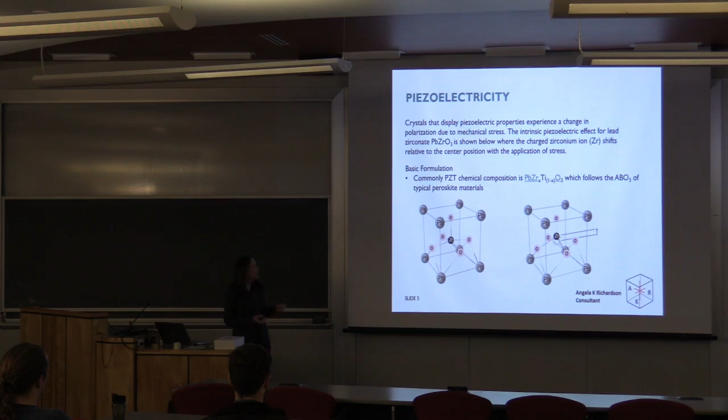So the reason you have the ability to create a voltage is the movement of that zirconium atom. You can add other dopants to this constituent, but basically, depending on what materials, what additives you add to that crystal structure, you'll get different electrical properties.

Within that ceramic structure itself, the way you get to a point where you have that polarity within the ceramic crystal overall is you have these domain structures. In an as-fired ceramic configuration, the domains are random. But when you process piezoceramic, what happens is those domains basically start to align, and overall you have the polarity of positive and negative.

The depolarization is when that ceramic starts to, over time, logarithmically, relax. So what happens is those domains start to want to go back to their original random configuration. And that happens logarithmically. So the first 10 days you may have a certain percent, then the next 10 to 100 days, the same percent, and so on.

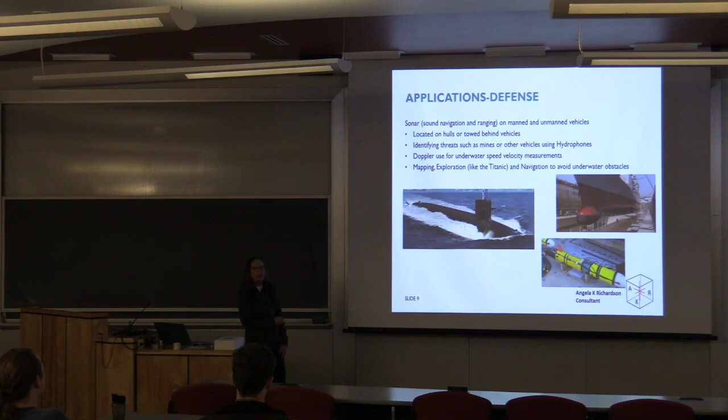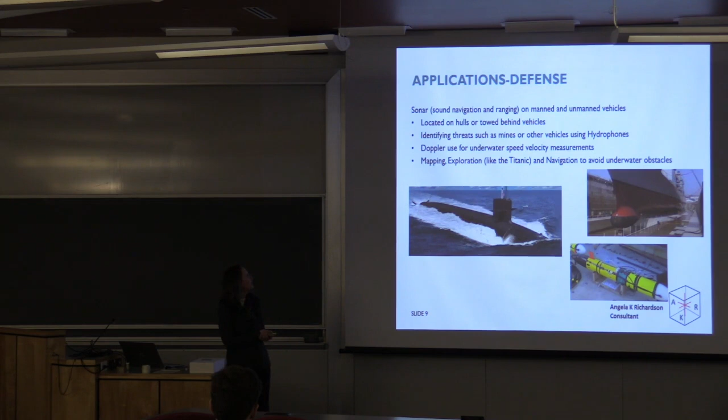So what's happening is on a hull-mounted ship, you have about 5,000 pieces of piezoceramic. Those piezoceramics act together as a transducer, sending out a signal to look for, it could be a submarine, it could be a geological feature that they're looking for. So sonar in general is identifying threats.

The other devices that typically go on the submarines are hydrophones, and those are primarily listening devices as opposed to projecting devices. So those listening devices are strings of piezoceramic that get dragged behind, also listening to what's out there in the ocean.

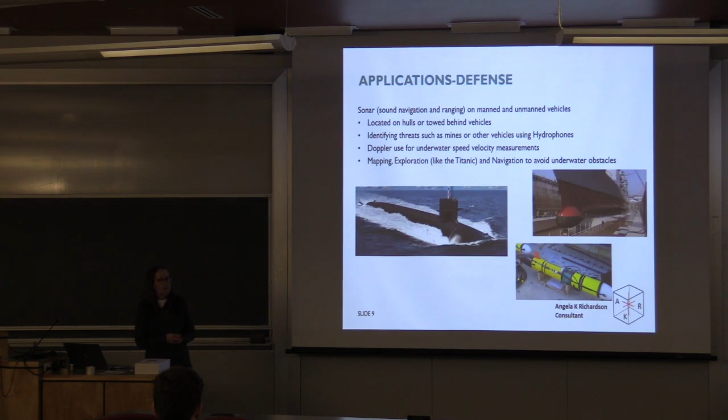Doppler, piezo is used in Doppler for basically speed velocity, and definitely mapping exploration like the Titanic.

In the medical applications, you see piezo out there in ultrasonic imaging. So anytime you go in there and get an ultrasound, what you're seeing is a transducer device that's sending out an acoustic beam, and then reflecting on tissue and coming back. And most of the transducers in ultrasonic imaging now are actually single crystal piezo.

Then also therapy, ultrasonic therapy, endoscopic therapy, breaking up gallstones, and treatments for cancer.

It's something that I was intimately involved in, in terms of finding out manufacturers and traveling the world to look into further.

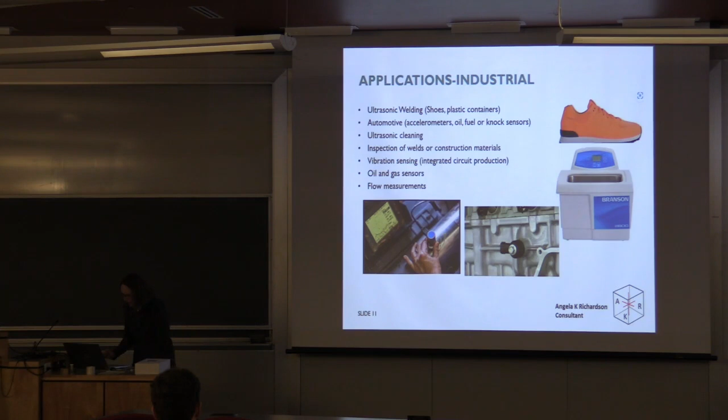And in commercial, you have fish finders, of course, haptic feedback. So when you play a video game and you feel the vibration, oftentimes that's a piece of piezoceramic giving you that feedback. Buzzers, like in your watch, micromotors for cameras, and your typical piezo lighter.

Now those piezoceramics that are in all of those devices, they come in all shapes and sizes. And Lindsay was gracious enough to bring some ceramic here. So whether it's at the end of the class or you want to just pass these around, I would imagine these are all lead zirconate titanate, so fairly heavy compositions there.

The larger the ceramic, the lower the frequency, somewhere in the 10 kilohertz range, and the higher frequencies typically in the 5 to 10 megahertz range.

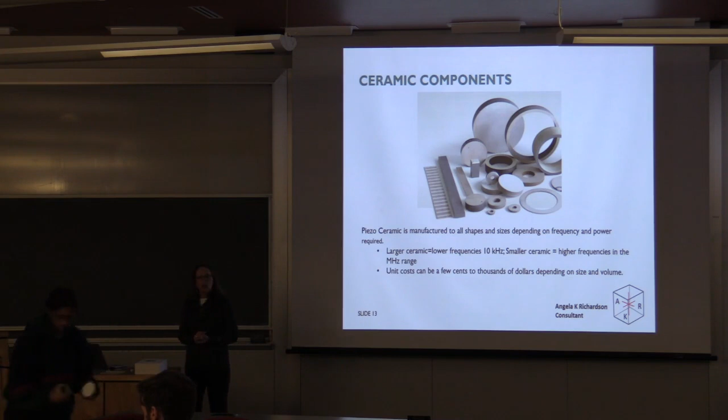Unit costs, this is where manufacturing comes into play. Piezoceramic can be only a few pennies, or it can be tens of thousands of dollars. So as a manufacturer, you have to think in that economic sense in terms of what market you're going to be in.

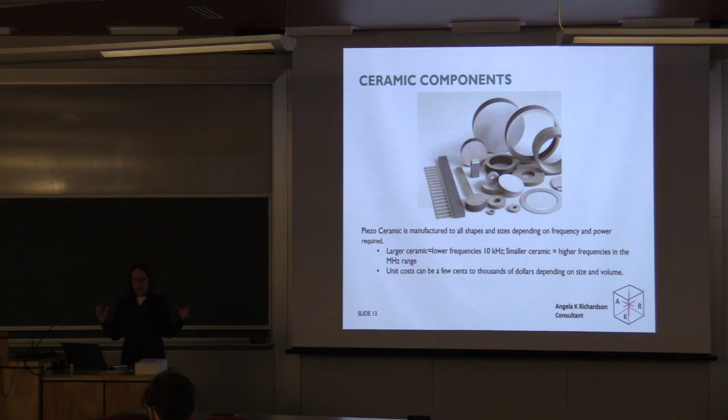So you're starting with metal oxides: lead oxide, titanium oxide, zirconium oxide, barium strontium carbonate, niobium pentoxide, iron oxide, etc. And then, like I said, those different dopants that are going in there provide different electromechanical characteristics. It's usually an electronic grade of raw materials, which means greater than 99% purity and a very fine particle size, usually large surface areas.

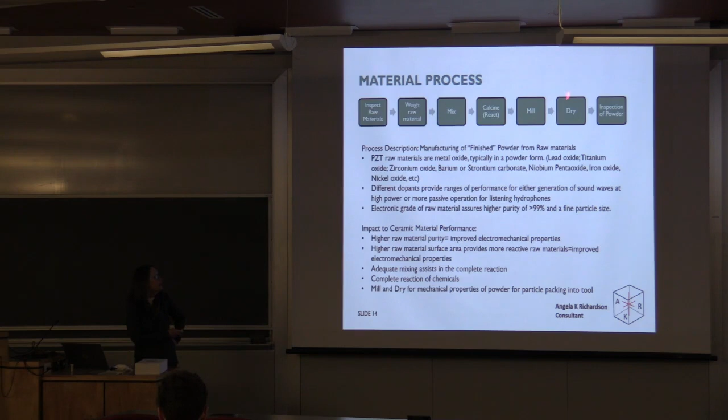After you've inspected those raw materials, you're going to weigh them, mix them, react them through calcination, and then mill them down to a fine particle size.

Then dry the powder and inspect it. So what I have shown here at the bottom is basically some of the industrial type of equipment you might utilize: a V-cone blender for mixing of the raw materials, vibroenergy mills to break down material, which can be used for mixing or for the milling process to reduce the particle size, and then drying.

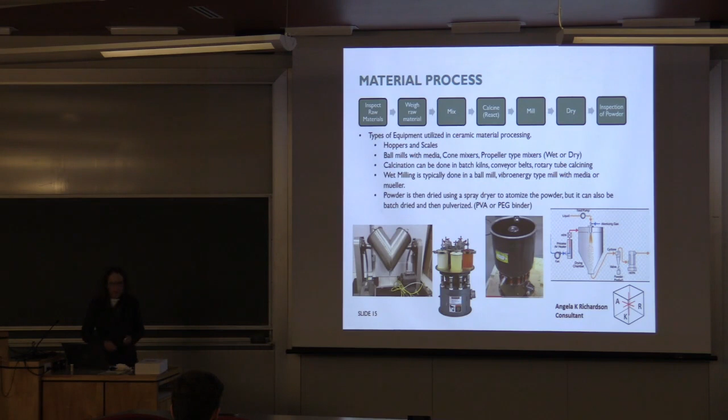Drying typically can be done by hand, but almost all of the commercial ceramic manufacturers have a spray dryer. In the milling step, typically there is an organic binder added, polyvinyl alcohol or polyethylene glycol binder, to assist later on in the compaction of that ceramic.

So then after you've got the powder manufactured, you're going to go through the ceramic process, and we'll walk through each of these steps here. There's just another picture of some more piezoceramic.

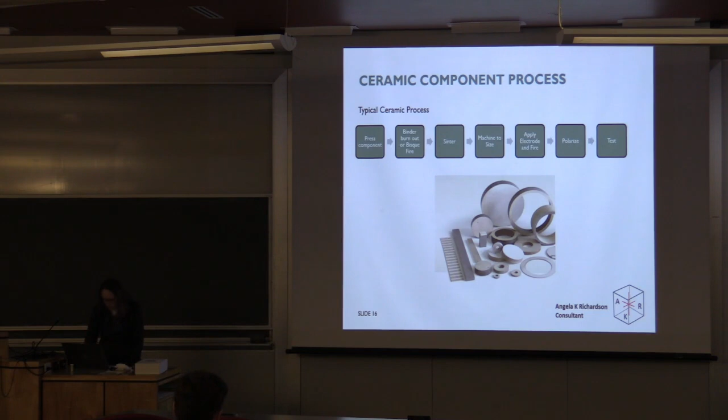First and foremost, let's press that ceramic. So we're going to take that powder and use either a hydraulic or mechanical press, typically to about 10,000 psi. This is a typical type of Dorst press you might use, a mechanical press.

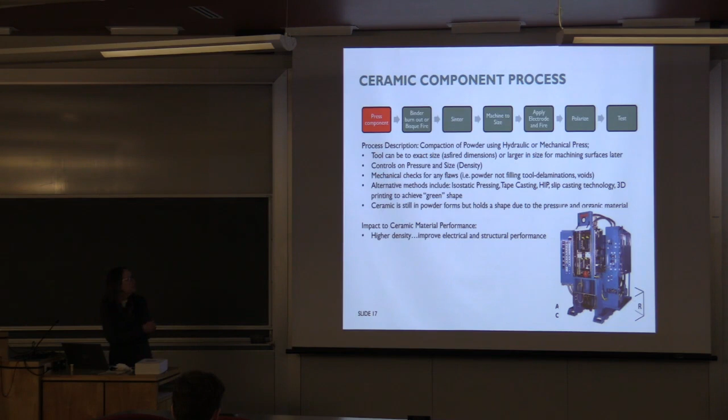We'll go to a particular pressure, and you get a particular size based on the tooling. What's critical is to check for any flaws in that green state of the ceramic, such as delaminations, voids, etc. The ceramic comes out still in powder form, but it holds its shape due to pressure.

I'm sure you guys might have equipment that does this.

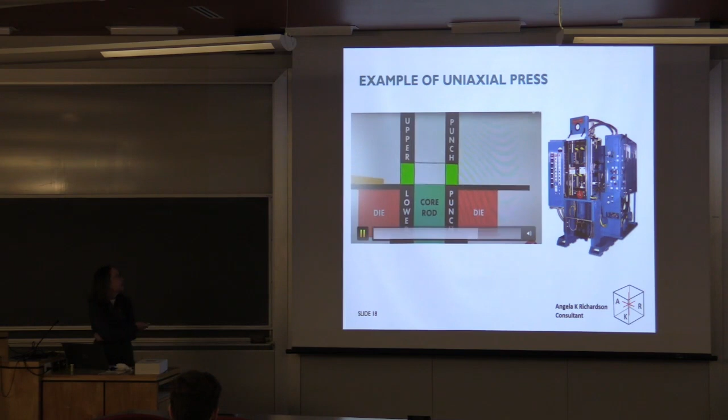So in that hydraulic press, you're basically using a feed right there to fill up, and then upper and lower punches to compress that powder, and then it just gets pushed to the side.

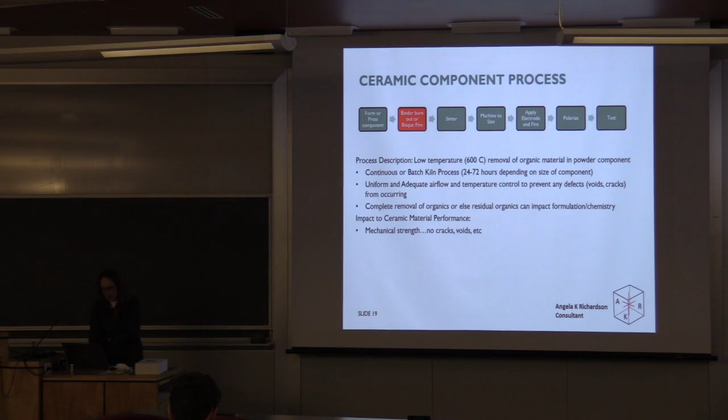Then the next step is, because it's a lead-based ceramic, we need to get some of those organic binders out of that composition prior to our sintering step. So what you have is this binder burnout, some people call it a bisque fire. It can be done in a continuous or a batch kiln, usually taking 24 to 72 hours. It's pretty critical that you have a lot of airflow because you want to remove some of those organic binders. Once again, the key feature there is just mechanical strength.

The next step is the densification, the sintering process. With a PZT-based material, you're going up to about 1200 C, processing it for about 24 to 48 hours. In manufacturing it's so critical - as students you might be doing some firing in small kilns, but think about a kiln that is essentially 6 feet wide, 10 feet deep. When it's that large, if you don't have uniform temperature, what you're going to get is non-uniform product.

And when you have a specification you have to reach at the end, you could have a lot of waste, and so your yield can be very poor. So it's so critical that you're maintaining a uniform temperature there, and we're talking like 2 to 5 degrees Celsius within that scope of distance.

You can add atmosphere. In the piezo world, we typically might add oxygen as an atmosphere to increase the densification. The components themselves are placed in saggers, typically alumina crucibles, to contain the lead volatilization.

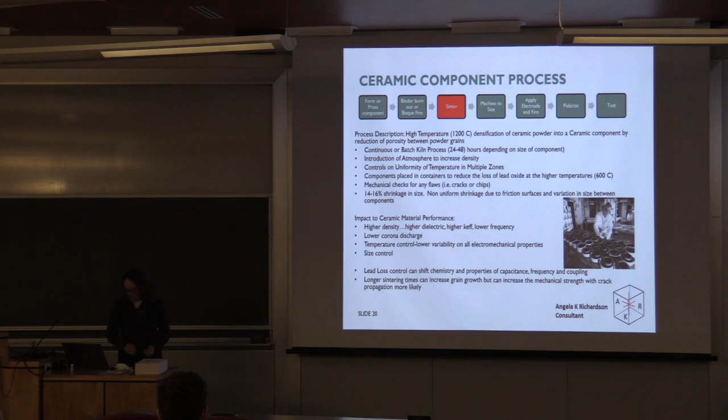In the next step, we're just going to do some machining process. Like any ceramic, you typically are using silicon carbide, diamond-based bonded media, and you can use any normal machining centers - they can be lappers, lathes, etc. And then oftentimes you will stress anneal that configuration because you've broken up that surface.

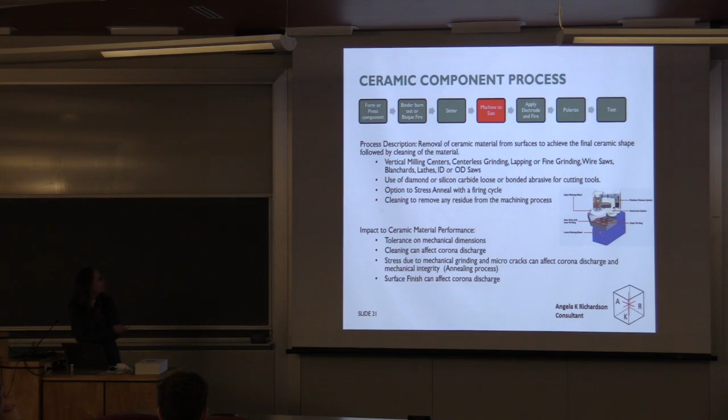The next step is, you probably saw in some of the ceramic that you have, it has a silver paste on it. And that's because we're going to solder wires to this ceramic, since it's an electronic component. So in that electroding process, we're going to apply a silver paste.

The paste itself is about 70% silver metal, a little bit of glass beads, and it's typically screen printed on, but it could be sprayed, dipped, electroplated, or sputtered, and then it is fired to make sure of that adhesion between the silver paste and the ceramic structure.

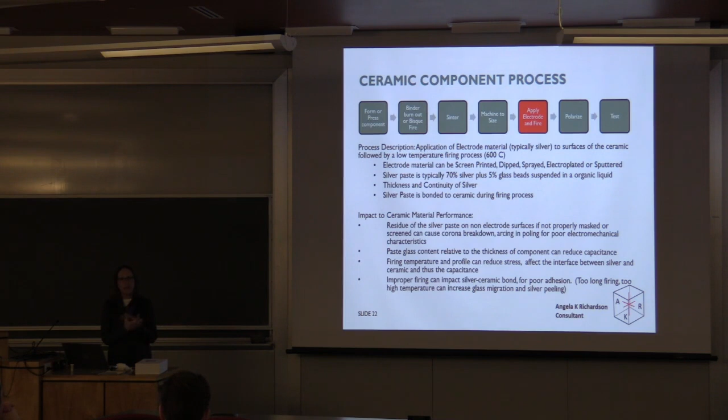The next step is polarization. We talked about that, aligning the dipoles. So the ceramic is placed in a bath of high dielectric oil. We apply a voltage to it, pretty high voltage, 40 to 60 volts DC per every thousandths of an inch, so it can be up in the 10s to 20 kilovolts.

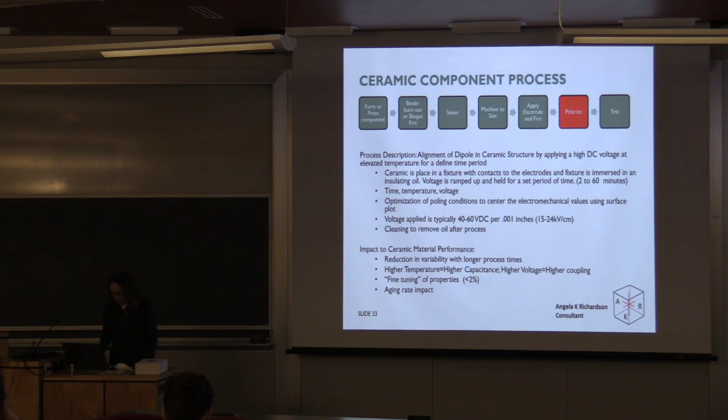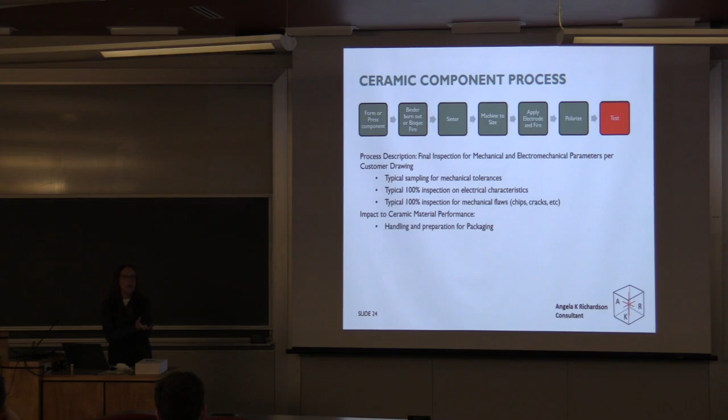Then that ceramic is cleaned and ready for its final test. So when you talk about manufacturing and assuring quality for your customers, most manufacturers will do some kind of sampling, or they might do 100% inspection, depending on the requirement and the difficulty of manufacturing that part.

Okay, you made that ceramic, but in the manufacturing world there's a whole other level of things you have to consider - those being documentation. There are procedures on how to run the equipment, procedures on how to validate the equipment so it can actually do what you want it to do, maintenance plans for the equipment so you cannot spare to have a breakdown of even one day, and then work instructions for that particular part.

So all that documentation has to be done in advance of even making one part. Then you have traceability - traceability back to the raw materials. You have records showing all the steps in the operation and who performed them.

Guess what? Boeing didn't do that. Think about that panel that came off - they can't even trace back to who did it. And whether it's the FAA or your customer or the defense industry, you have to have those records, and they have to be available like that.

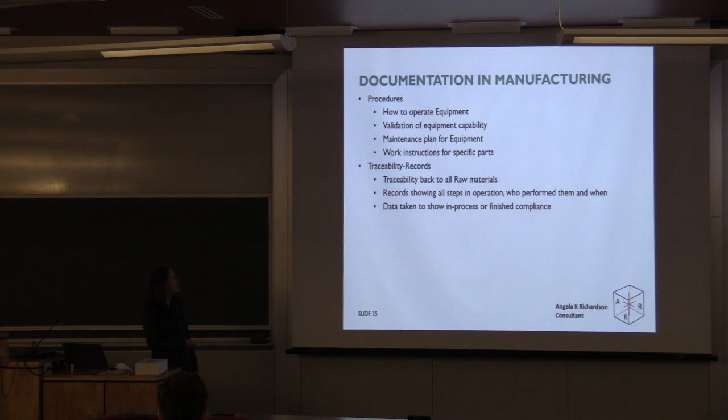So then certainly data that you've taken in the course of your process. Training—pretty self-explanatory—all your operators need to be trained.

Lean manufacturing is another key thing in the manufacturing operation. I don't know if you've heard of 5S before—reducing waste by looking at the flow. 5S is about making sure everything is organized: you go through your factory, every tool is where it should be, everything is clean. I've been in factories in Europe where if you look at the light fixtures above you and they're filled with dust, guess what—you're going to have foreign objects in your ceramic component. So if you're not considering cleanliness as part of your manufacturing process, there's a huge opportunity to fail there.

Statistical process control—how you sample, how frequently you sample—and multivariable testing. If you have a problem and want to solve it, you could try testing one thing at a time: test temperature, or test a different piece of equipment. If you do that, it could take weeks and months. Multivariable testing is a way to test all of those variables at once, look at it statistically, and see what is significant, what is causing your problems.

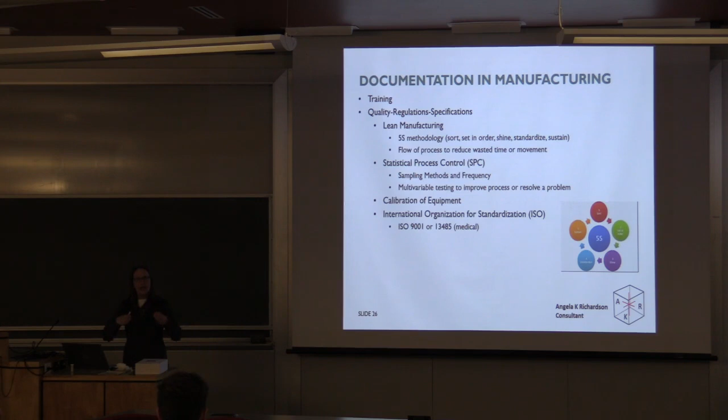Calibration of equipment—obviously I don't want to go out there and use a micrometer or a caliper and then find out later it wasn't holding tolerance. So that's critical. And then the ISO documents—anybody who comes into your facility is going to want to see that you have certification for certain standards. ISO 9001 is pretty standard in manufacturing, but 13485 is what the medical industry uses. Basically you're defining how you're going to do a process and how you're going to keep your records.

I'm going to finish up here and hand it over to Lindsey, but as I look at the challenges for people going into manufacturing in the ceramic industry: dependence upon material sources outside North America. Most people are getting their raw materials from China and Asia. Is that a problem? It could be if all of a sudden you can't manufacture what you need. I think the government is very concerned about that with chip manufacturing right now.

Dependence on lowest cost labor—when I look at where I want to manufacture something, places like Mexico, Eastern Europe like Romania, or Asia might come up. Those are great options, but you're dependent on a remote location for your manufacturing. And then there's automation to stay competitive. If you're trying to reach a price point of maybe a dollar, or 50 cents, or even 5 cents, you can't do that unless you've put the time and effort into automating your process.

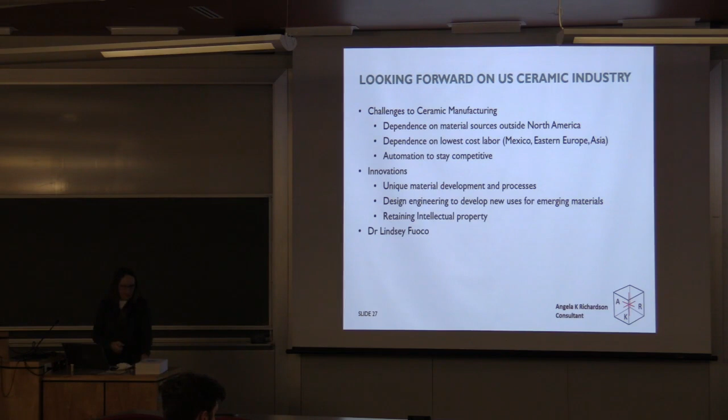Looking forward, I think Lindsey will talk a bit about material development, design engineering—how to use piezo in new devices going forward—and retaining intellectual property. I can tell you I've worked at companies where their IP was taken overseas, and from there on they basically lost their competitive knowledge base and business. So with that, I'm going to turn it over to Lindsey, and she's going to impress you with her next generation stuff. Then we can take questions at the end.

Here's the HDMI. Yeah, hope you have an HDMI. And you're okay with power? Yeah, okay, cool.

Here's some more—this is some of the ceramic that was used in some of the brain cancer research. I don't think I put that on, but...

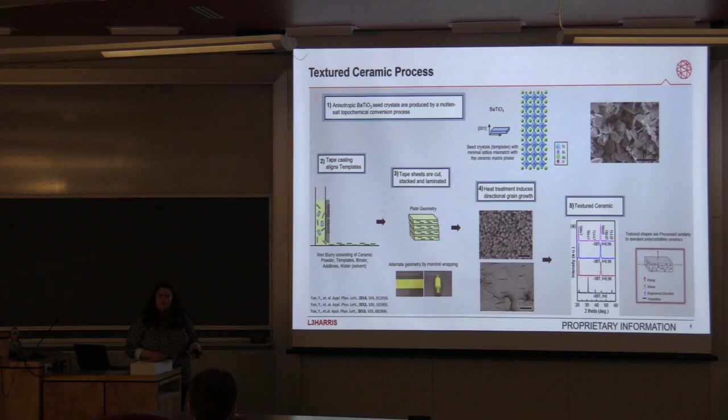This is just an example of a structure here. Once it's been heated, we electrode it, we pole, we do everything the same as a typical ceramic, as Angie talked about earlier.

Another important extra step is we have to grow these template particles. We may use less than 5%, but they need to be in a special, highly anisotropic morphology. We take an Aurivillius phase and do a molten salt process, since this Aurivillius phase typically always grows as a plate-like structure. Barium titanate itself usually wants to grow in a one-step solid state reaction as a cube. So we use this topotactic reaction series to get our barium titanate, but keep the plate-like morphology from the first structure type.

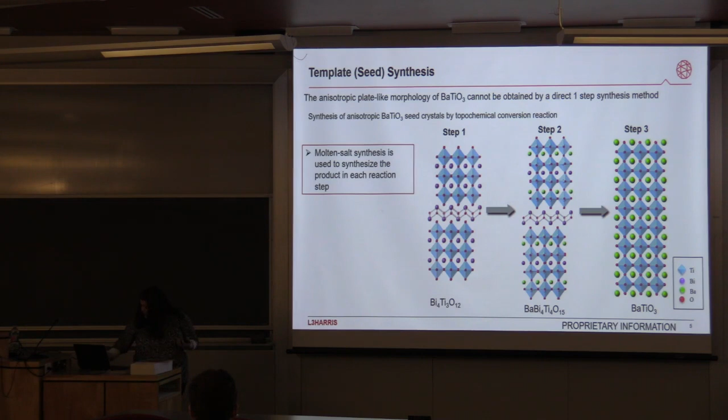The way we do that is we use a molten salt process. Really, it's just adding salt, sodium chloride, potassium chloride. We like to use the eutectics because you can lower your reaction temperature by combining them. Our metal oxides and the reagents will precipitate out as metal oxide crystals. This is used in a lot of different things to target alternate crystal morphologies that we wouldn't otherwise be able to get.

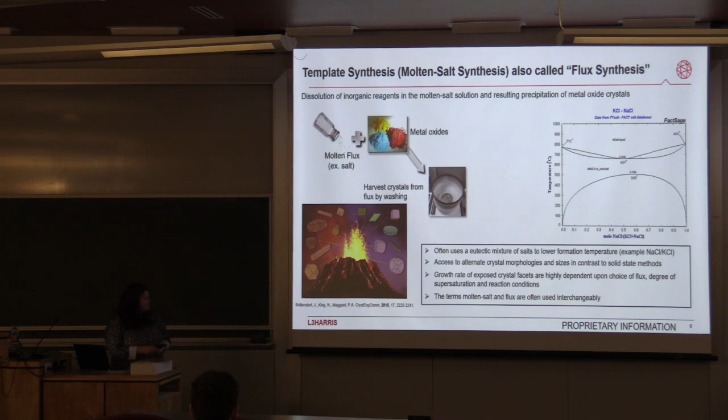For textured manufacturing, you need an automated tape caster, which has automated gap control of your doctor blade so you can control your tape height. From there it goes into another piece of equipment. You transfer your roll, and your roll then cuts your tape into what I've passed around, which you can peel from the backing, a shape that you've set, and puts it into cassettes.

From there it gets peeled off the mylar backing and stacked by another automated piece of equipment. When you start out R&D for this, it's all done by hand by technicians - all the cutting, peeling, stacking. So this is really the next step of the process that we now do in manufacturing. From there it integrates back into our same process, and we also utilize equipment we typically have in our ceramic processing factory.

A really important part of all this is maintaining a set of key processing indicators. The way we track that is powder X-ray diffraction, particle size analyzer, and scanning electron microscope. We don't do this for every batch, but as ceramic manufacturing, when you see an issue you have the tools to look at it, and there are also points when you need to check these things to make sure the product you're putting out at the final end stage is the same each time.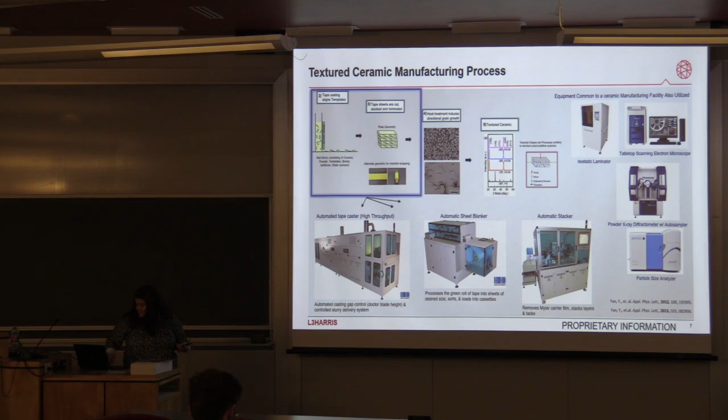So I just wanted to show this here. Angie touched on some of this. So where does textured fit in? This is actually our process at L3 Harris, or Edo Western, and this is kind of how it proceeds.

We make our matrix ceramic that we're going to texture similar to every other ceramic, and then it deviates. We send it to tape casting, it gets cut, it gets pressed in our textured ceramic manufacturing center, and then it joins up again. It fires exactly the same as our other ceramics. What's really awesome is we're able to maintain the same CPKs as we do for our non-textured ceramics, which have been around for 70 years.

So with that, I didn't want to talk about too much today, but yeah, that's the next generation of ceramics. Here I've shown - I can pass this around too - this is textured, it looks exactly the same. You're not going to know unless you put it in an X-ray or an SEM or look at the properties. But that one hasn't been electroded, I just pulled it off the shelf this morning.

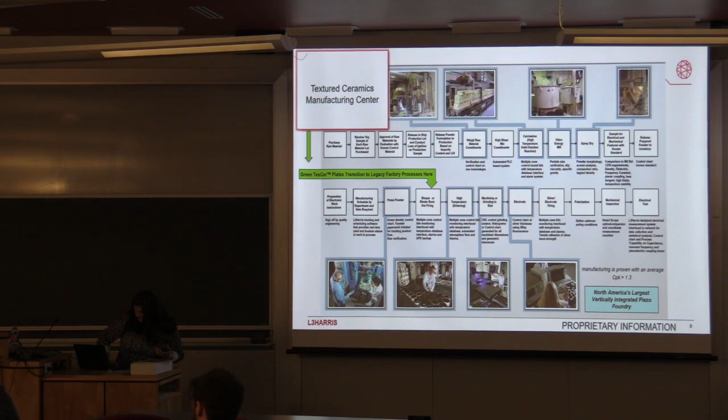Yeah. So Lindsay, in the texture material, are you using - is it going into the same types of industries and applications, or is it primarily focused on defense?

You know, it's going into the same industries and applications. I think with a lot of new stuff like this, defense adopts it first, and that's where we get our most backing. But certainly in the medical industry, what it opens up is, for ultrasound like you showed, that's primarily single crystal. Textured has these improved properties where I think it's really going to replace some of that as well and be a lot cheaper. So yeah, certainly we're targeting other uses as well.

So I'm doing tape casting for my own thesis research, and I've seen a lot of problems with aqueous tape casting. How do you guys get around those issues?

First off, yes, it's much easier to do non-aqueous, but when we started out, we wanted to tackle aqueous because at the end of the day, we would have to build an entirely different facility with different ventilation and everything. I think a lot of it comes down to understanding your viscosity, your rheology, particle sizes—there's a lot in there. It's not cut and dry when you say, oh, we'll just increase the doctor blade and we'll get a thicker tape. That's not quite how that works. So yes, there are some obstacles, but early on I think it's good to struggle with it, because this is something that's more easily adopted than having to put all this new ventilation in. And aqueous is more difficult.

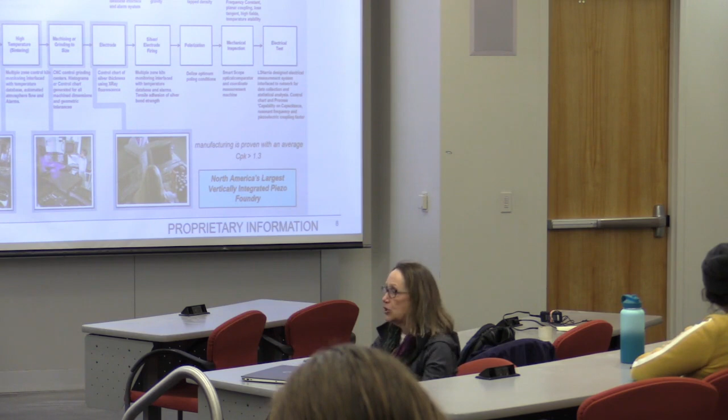As far as controls for dielectric, it is within a wide window. Let's say a wide window being plus or minus 15 to 20 percent - it's easy to hit that. When you're restricted down to a wish list of maybe plus or minus 5 percent, it becomes very difficult in terms of repeatability. And I think the key there really is that if you change your source of supply, whether forced to do that or you elected to do that, that could totally affect that performance. So you may have to adjust chemistry, you may have to adjust process to zero in on that value.

But could you talk about when you think the Salt Lake facility will be lead-free, or will it never be lead-free? I don't think it'll ever be completely lead-free. We offered lead-free formulations from the Western facility.

Products that it goes in are going to be around for a long time, especially military products where they use this for 20 more years. You've got a specification. Right, exactly.

Now, I will say that there are some obstacles to having lead-free and lead-based products. Lead oxide is pretty volatile at a considerably low temperature, about 950. But we're careful to separate all of that. That is an obstacle that some people see - can you do lead and lead-free in the same facility? Yes, we do have to do certain controls.

But because of the defense industry, there's been an exception for a long time in terms of using lead-based materials. Will that go away? I think that there certainly is a push to do that, but in the course of national security, we're not going to do that. Probably not in my lifetime - let's put it that way.